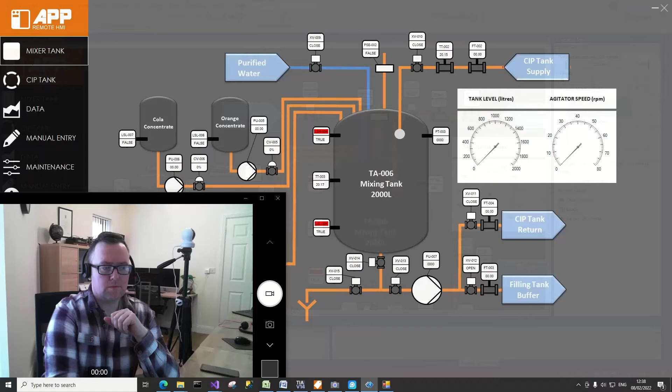I'm doing this video to cover the use of a test system which I've put together, which is going to be used as a platform to test out a separate application which is used to follow the batch execution process of recipes in real time. So what I'll cover here is a scenario that's going to be used for that purpose.

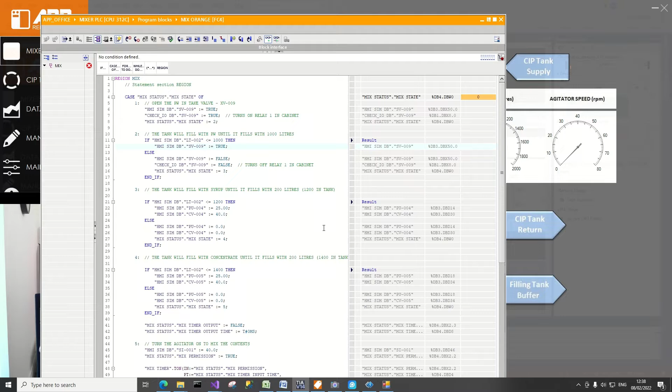So what I have here is a tank-based system, and it's basically just a mixing tank, and I'm going to follow a recipe both on the HMI as it executes, and I'll also do it then in real time. This is SCL in Siemens S7, so we'll be able to see effectively a state execute down as we go, getting feedback from physical I/O and then some simulated values as well.

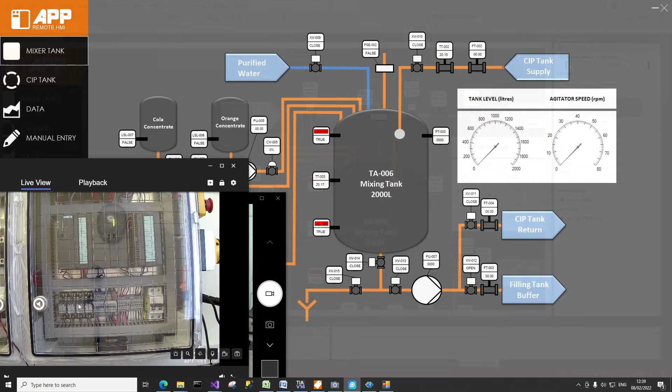What we'll be able to watch in real time is just a cabinet here, and basically these relays will come on and off as the recipe executes. The mixing process can be summarized as follows. We have a valve here which opens up from a purified water loop. A tank will fill up to 1,000 liters.

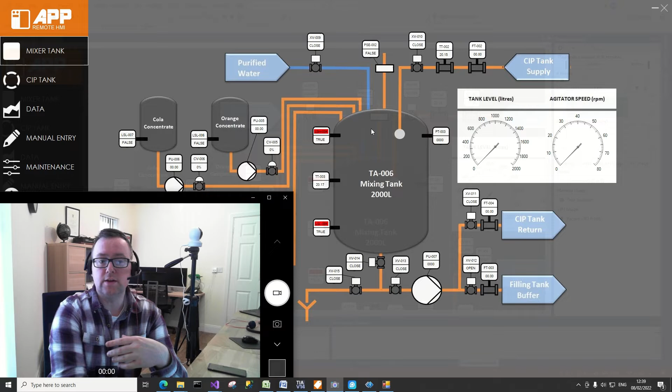Then effectively what we have here is a syrup mixture which is going to be added to the tank. Then some concentrate is going to be added into the mixture, and then effectively we will agitate for a period of time, and then we will drain the tank out to a filling buffer tank. So I'll get started here, where I will jump through the sequence, and I'll explain it as we go.

So at the very start, this particular valve opens up, and what we'll see here is that the tank level begins to rise. So when this actually hits 1,000 liters, this valve up here will cut off, and then we will see that the syrup mixture will begin to be pumped in, and a control valve will open to a certain percentage as well.

So this valve closed, XV09 closed, and then we have this syrup mixture being pumped, and it's 200 additional liters which will go into the mixing tank. So once we get up to 1,200, the concentrate will then begin to be pumped in. So that will then go up to 1,400.

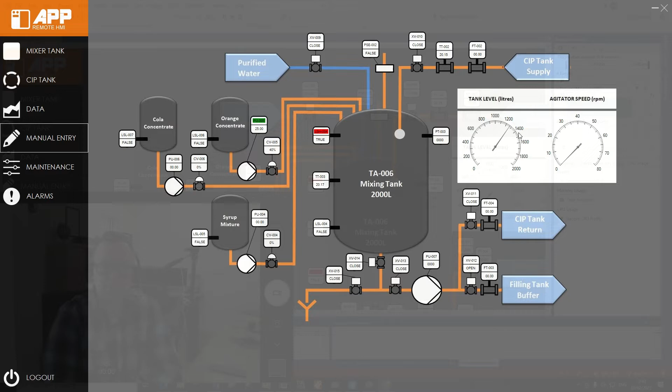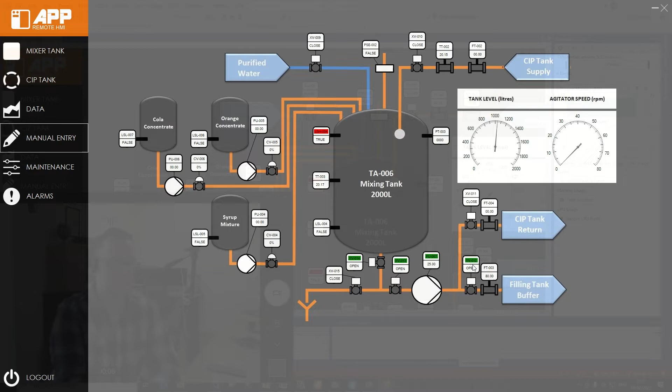And then essentially, as soon as that happens, we will agitate just for a period of time. So we agitate, we go up to 40 RPM. Then this will come down, and then we'll see these particular valves and the pump, etc., and then we have a simulated value for the flow meter. Now this tank will begin to entirely drain, and then we'll have our process basically ended.

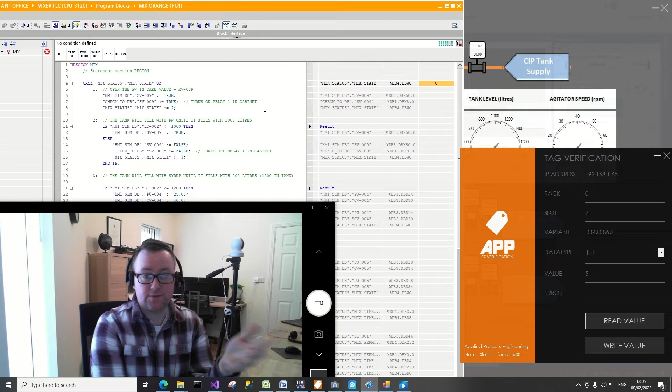The next part now is to run through the PLC code. So the PLC code is done in Siemens SCL, and this is effectively structured text. What I'm going to do with this particular application here is manually trigger the sequence to occur, and then I will pretend that there are values that are coming back from the physical system.

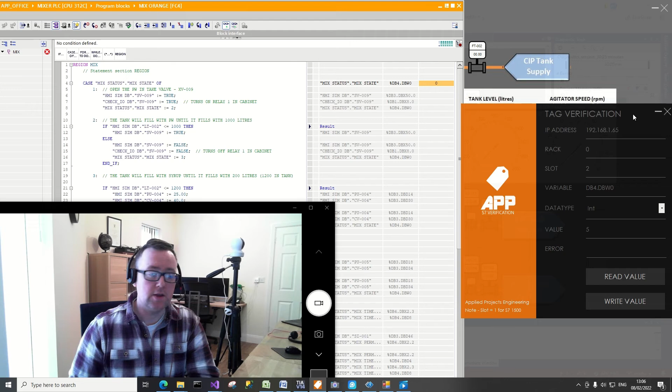So normally a tank will have a level transmitter, and the level transmitter will have a scaled signal that comes back, and then it is turned to a meaningful value, such as liters, or something similar. So I'll also then be able to show the actual cabinet which is linked to these relays, as I'd said earlier, and they will trigger on in real time as the program executes.

Okay, so first off, I'm live in the program, and I can see that the state is at 0, and it has to go 1 into 2 into 3 into 4 as the program moves along. So I'm going to turn the value to a 1, and we'll see what occurs here as the program executes live in the PLC. So I will write down, and we'll see here that the representation of the valve has come on, and that particular one was up here.

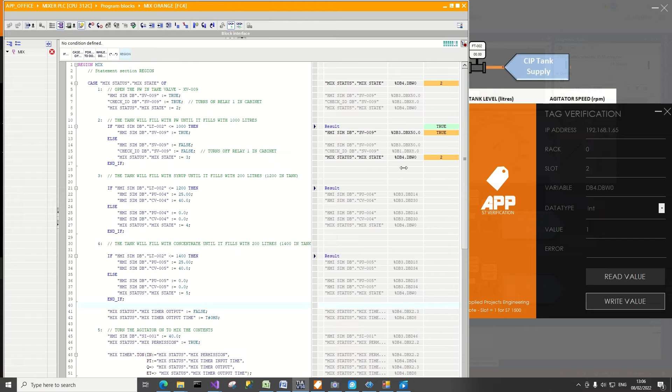Okay, so essentially what we're waiting for is the tank to fill up to 1,000 liters. So I can see that the address is DB3 DBD42. So here I'll go DB3 DBD42. It's a real number, and I'm going to put the tank level as being 1001. So I'll write that down, and I can see then that my valve has turned off.

So that's the input valve from the purified water, and basically what I'm doing is pumping up the syrup right now. So we were looking for the tank level to get up above 1200, so I'll write that value down, and we'll see that we are now pumping the concentrate. The values will refresh up here when needed. So what we're looking to do is get up to 1,400.

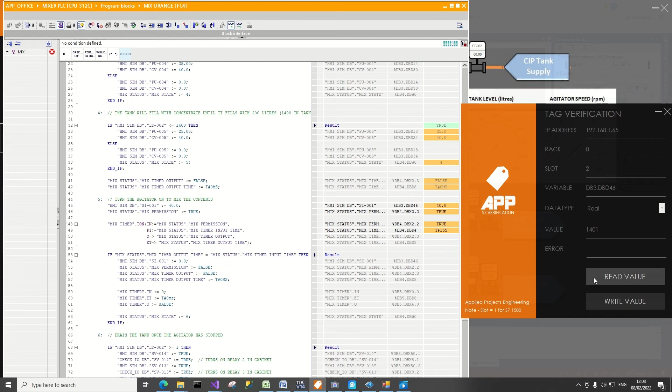So we'll get up to 1,400, and after this we're going to agitate for a timed period. So I'll write that down and we'll jump across here. And basically what's happening here is that we're in a timed situation. So the agitator's come on, it's gone from 0 and it's going to stay at 40 for a given period of time.

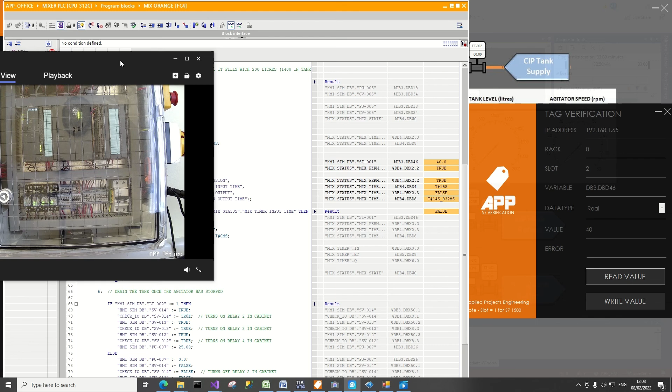And after this timer has gone up, we'll have these 3 valves here, and they represent the drain valve and the other valves directing out to the process, to the filling tank. So our mixing tank is draining away, but it will only fully drain once the tank goes back to 0. We're down at this particular area here. So we'll see how much is in the tank, and it's 1,400.

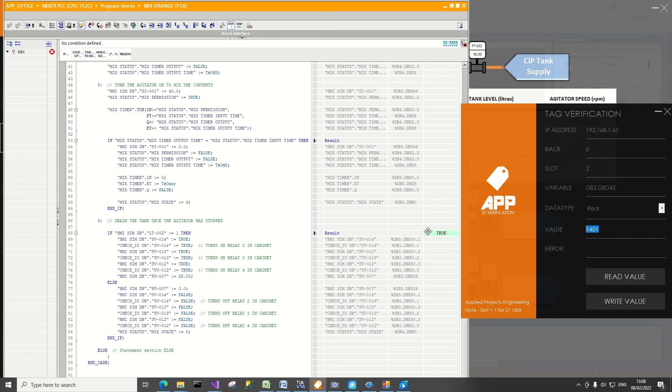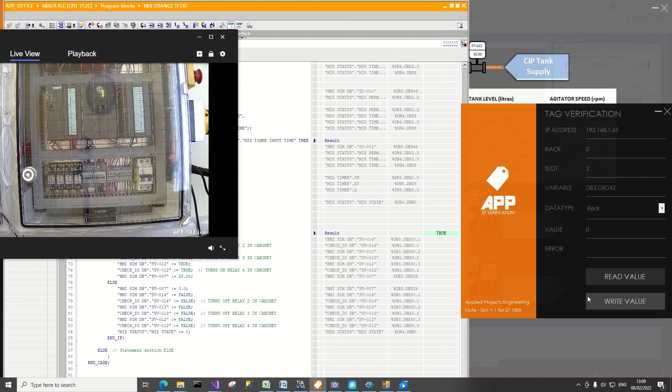So when we bring this back to 0, our 3 relays are going to go off in real time. So we'll send that down, and they all switched off as the tank had nothing any longer in it. And basically what we end up with is a tank that's ready to be cleaned, and then we have a CIP system which can come in and run a cleaning cycle through it.

Okay, so the purpose, as I said, of this presentation was just to outline a testing scenario for a separate application further along.